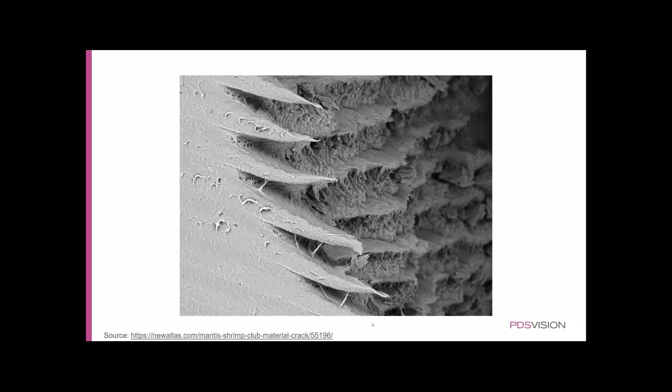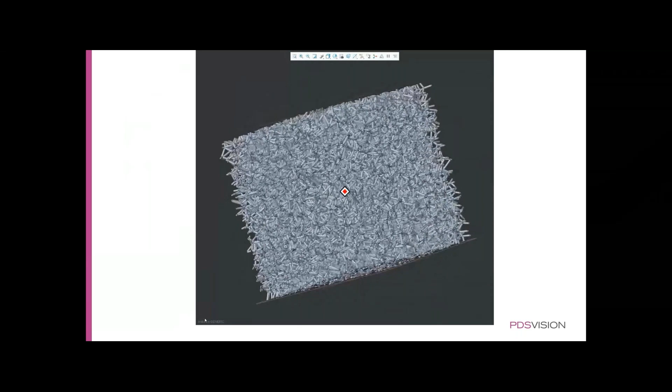What's exciting is we can start to do this sort of stuff in Creo. What I'm showing you here is an animation. This is not the mantis, but this is a Creo lattice that I created, and it's an immensely dense and very complicated set of geometry, but it's created with one feature called lattice, and it's one of the best features in additive manufacturing that you can take advantage of, that I'll be talking about a little bit later. Just look at how complicated and interesting that shape is.

So this gets me excited about what you can do. You can actually do a lot with 3D printing these days. I have a 3D printer in my basement. I hope you do too. I find that there's a lot of sustainability play that you get with additive manufacturing.

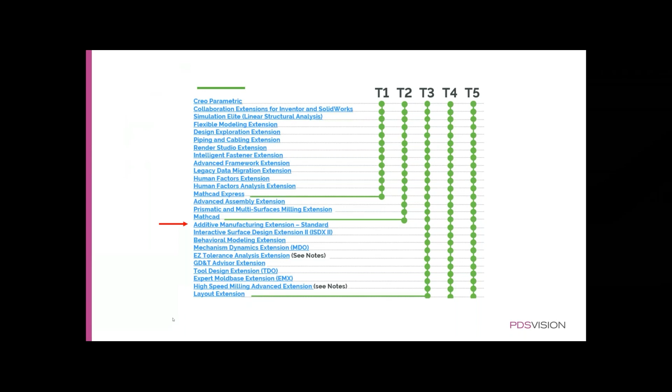I should back up and say that the additive manufacturing extension comes with a T3 license. So if you are a T3 license holder, you already have the additive manufacturing extension. You have the standard capability. You can also buy it as an a la carte feature.

What it does is it lets you take parts and add these lattice materials inside them in various different forms. You can choose different types of forms. There's different types of beams and lattices. You can run analysis on these various items. And then you get some help packing a tray so that you can print a lot of these all at once in a printer setup.

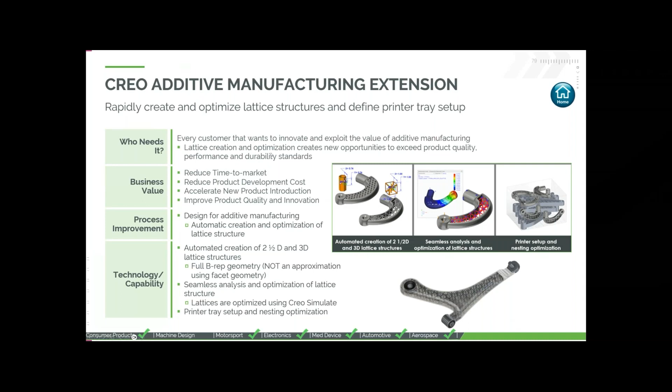So this is the kind of capability that you get with the Creo additive manufacturing extension. There is yet another extension that is available. I have access to all the capabilities, but I did want to point out there is a whole other area of printing, which is metal printing.

I won't be covering much of this today, but this is the advanced part of Creo, which has an integration with Materialise. You know, when you buy a metal printer, which is a big piece of capital equipment, it's expensive, and it comes with its own build processor, and it comes with its own little problems. And Materialise is a product which is like a build processor. It's like a slicer, and it helps you get the parts on the tray accordingly.

I want you to notice this part here looks like a stamping. And that's what's interesting and sustainable about 3D printing, is that I've met people who say they just need one of these. They don't want to go through the trouble to make the stamping that's needed to make this part. We're at a point now where we can actually design things, print them, prototype them, refine them, and then after we prototype these things, we can actually do the work to make the stampings if we want to mass produce.

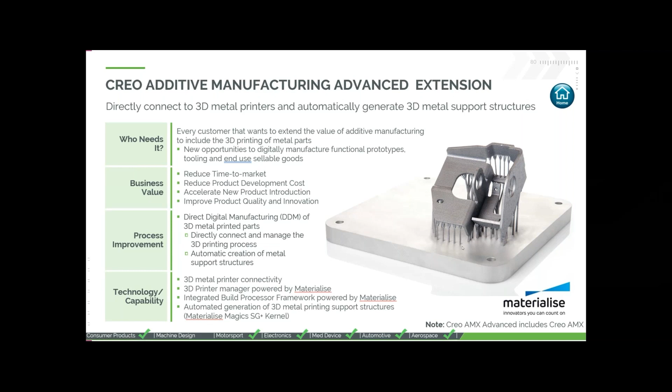But some of the capabilities that you get with this is the ability to wick away heat, and dealing with heat and thermal when you print with metal is a big deal. So that comes with the advanced part of Creo. So I want to step back.

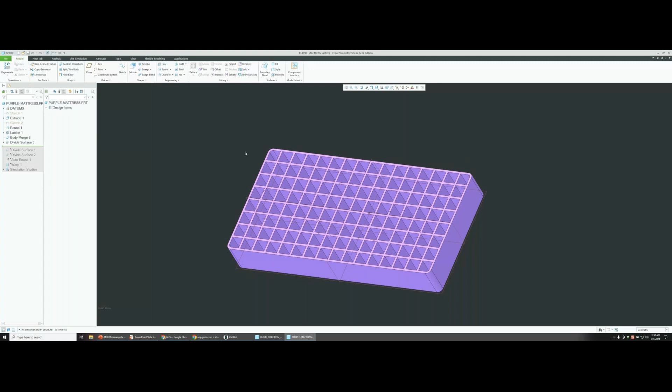Imagine if I got hit by one of those shrimps, and I'm actually allergic to shrimp, I would need to sit down or lay down on a purple mattress. I thought it'd be fun to explore that a purple mattress is indeed a metamaterial. If you don't know, metamaterials are a form of biomimicry. We all know that a honeycomb is created in nature, and so are other shapes, and these are all forms of lattices. Now, this part here was created with just one lattice feature.

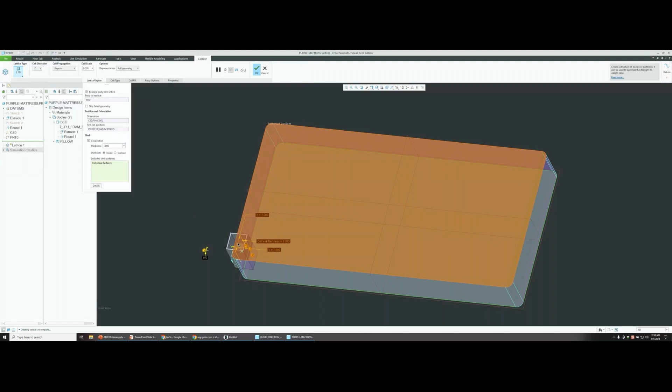I know there's lots of ways that we could think about creating something like this, but I thought I would show you that right away I've redefined the lattice, and this is a 2.5D lattice, and I'm pointing it in the Z direction, and I've even specified which corner I want it to be, and if I zoom in, I get all these little handles. I'm going to warn everybody to stay away from these handles. These handles can actually be a little bit bizarre to work with, so I recommend that you actually type in your values.

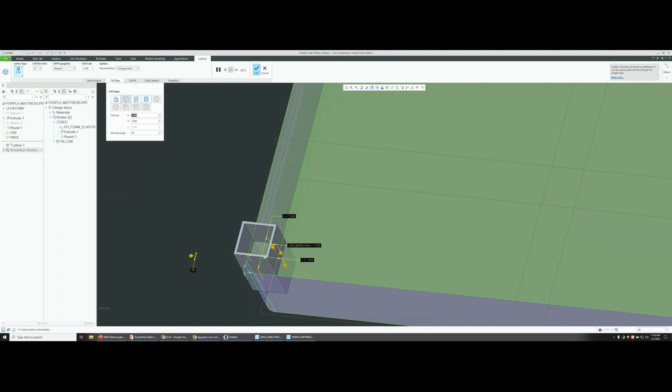So in this particular case, I've chosen a square. What would happen if I chose a rectangle? I'm sorry, a triangle. Okay, so I'm just going to click triangle. I'm going to click OK. And suddenly my material should change. And now I've got a purple mattress in a different form.

And I've actually taken this and done a live simulation to see what the effects would be if I actually did lay down on this mattress. So there's a sort of a figure of some pressure. I actually typed in my weight, and I can deform this. Oops, that didn't look very good. Hold on a minute. Animate, deformation. It's just happening there. Animation options, speed, scale, play. There we go. Look at that.

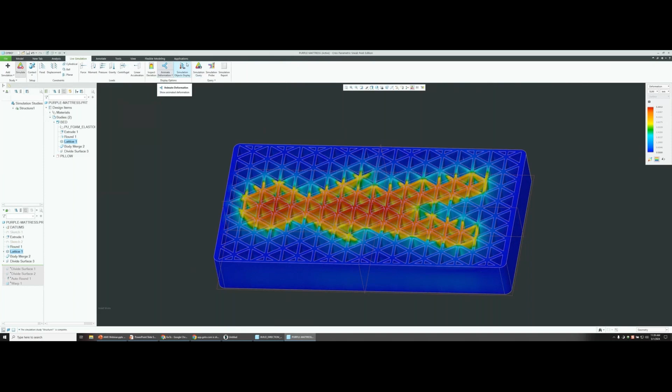So I could flip between different types of lattices and run these kind of simulations, and very easily see what the impacts are going to be. I've actually simulated this as foam, and this is just a simulation of where the impact would be with this divided surface that I put on here. Let me shut this off and turn off the deformation and some of the points there and get back. I want to create a new part from scratch and show you how to create a lattice in the first place.

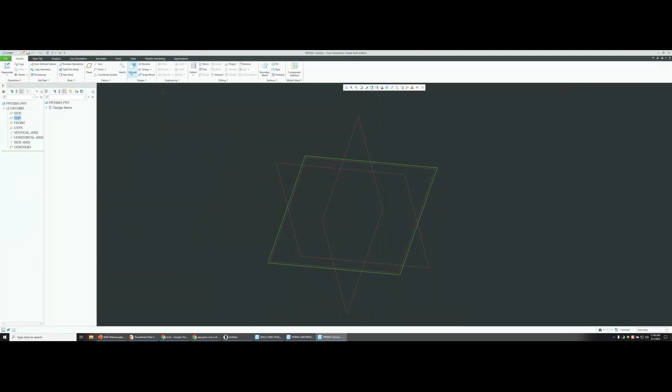I've got Creo here. This is Creo 10, and I'm also going to be showing Creo 11. I'm going to be showing a new capability in Creo 11 to actually connect lattices together. But let me show you a very simple basic demo. I'm just going to create a block very simply here.

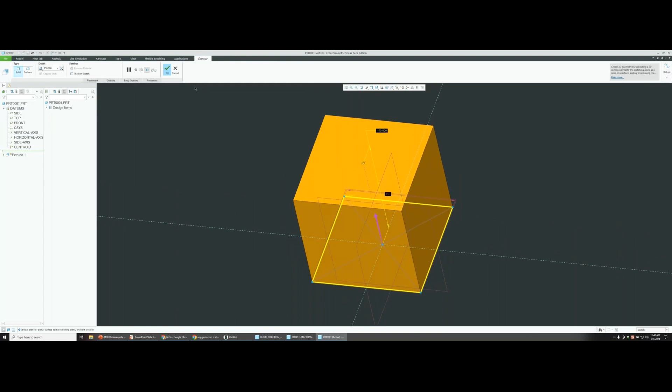Hopefully you all know how to do what I'm doing here. In Creo 10, they added a great feature: your very first dimension, I can type in and it automatically scales, which is beautiful. Saves me a lot of time. 150 - there, I've got a box.

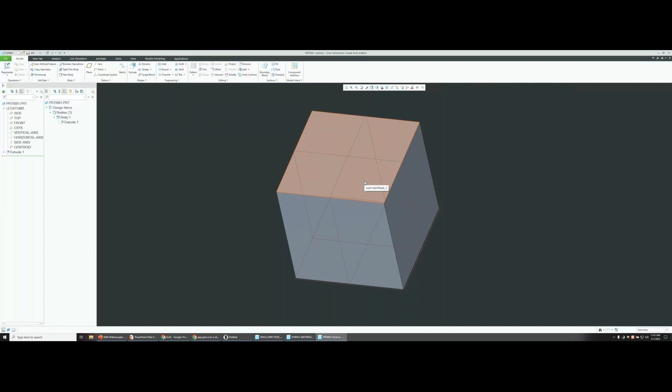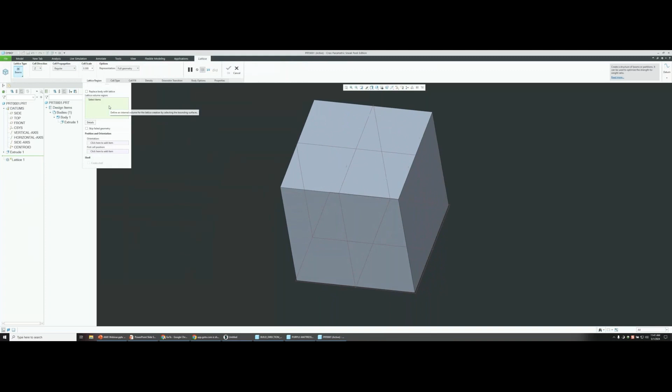I hope everybody on the call has experienced using bodies. Right now, every time you create something in Creo, you're creating at least one body. There's cases where I may want to specify an area where I'd like the lattice to be. For this simple explanation, I'm going to go into the lattice by going to the engineering tab, and I have something here called lattice. The very first thing it's going to ask is to replace the body with lattice, so I'm going to click replace.

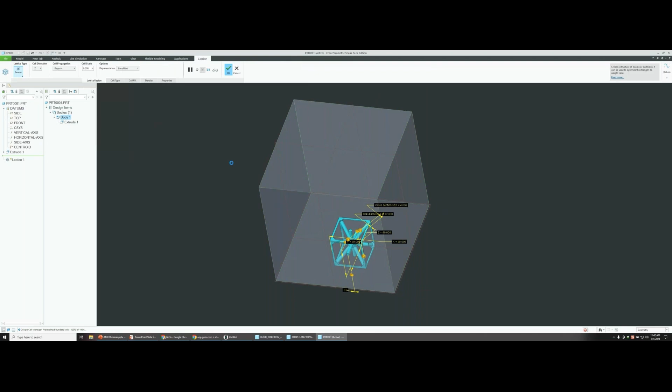The UI here goes from left to right. This is basically a beams type lattice. Here's a tip: don't use full geometry for now as you experience and play with this - simplify it. I'm going to go with simplified, and I'll explain that later. Let's just go see what is created with the defaults. Look at that structure there - that's quite interesting how that was created.

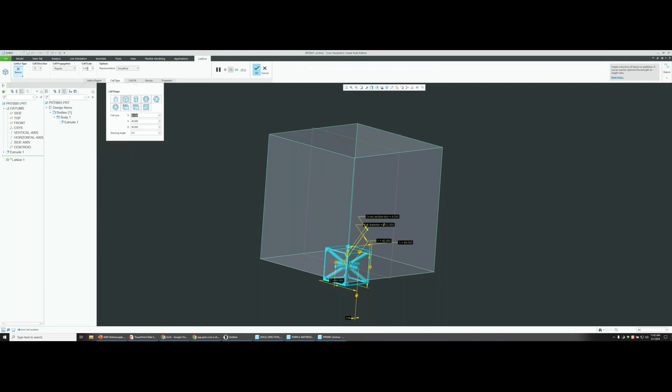Now let's go see what other types of stuff we can create by redefining that lattice. This one is called beams. Like I said, I don't recommend moving any of these with the draggers - I'd work directly. There's a capability here called scale. Scale works - if I wanted to make this double in size, I could hit 2 and I would double that. Now it's scaled accordingly - it scaled the ball, it scaled the beams, it scaled everything.

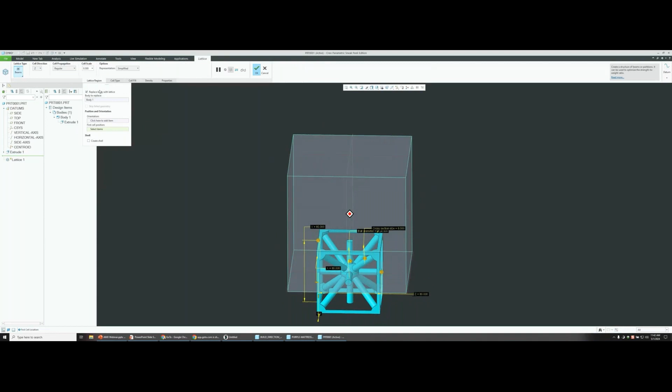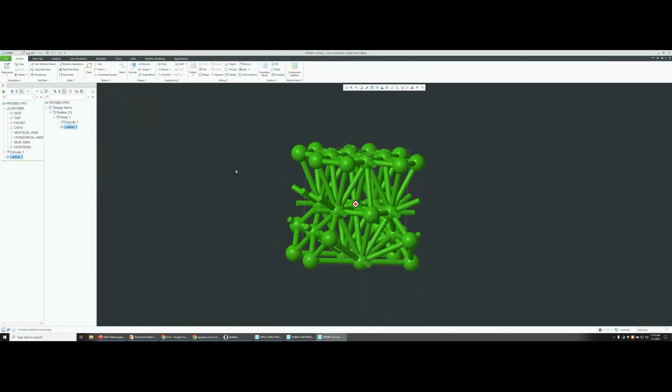Let's go back and take a look at what some other things I can do beyond beams. By the way, I have these other types of figures I can create - quasi-radial. I can say that I want 6 sections of this and see if it will let me take that, and I'll get a sort of bizarre shape here. If I realize that's not the right scale, I can keep redefining this feature over and over again and changing the scale down.

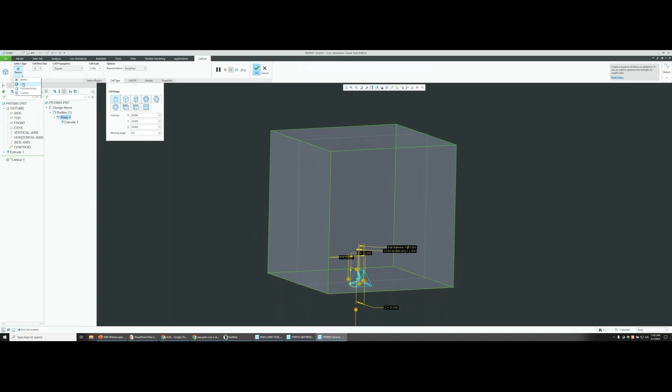One thing I want to show you about the lattice that I haven't explained yet - I'm just going to switch this back to something more normal, like regular, and maybe change the cell type to triangle and change beams to something called 2.5. This may make a little more sense for people. Let's say I was making a heat exchanger and I wanted to create something like that - maybe I want that to be a substrate where I plan on putting a piece of material on one side, and a piece of material on the other side. Let's go ahead and redefine this.

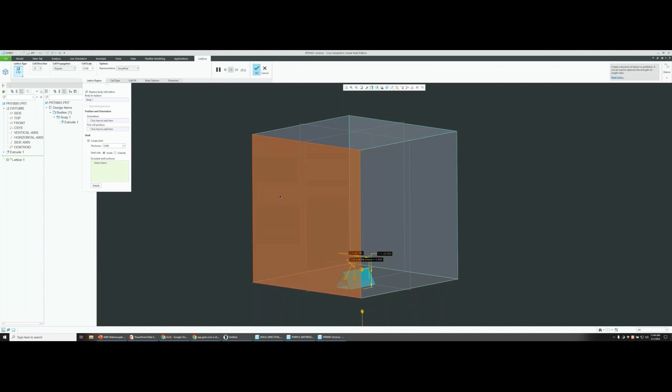I'm going to show you that the lattice capability also has an extra feature called create shell. So if I create shell, I can say that I want my body to have a 5mm shell on the inside, and I'm going to pick 2 surfaces. This surface, I'm holding the control key - I'm using a space mouse, by the way, to spin my model. I'm going to click that, and let's see what kind of geometry that creates. Now I've got something that is like that.

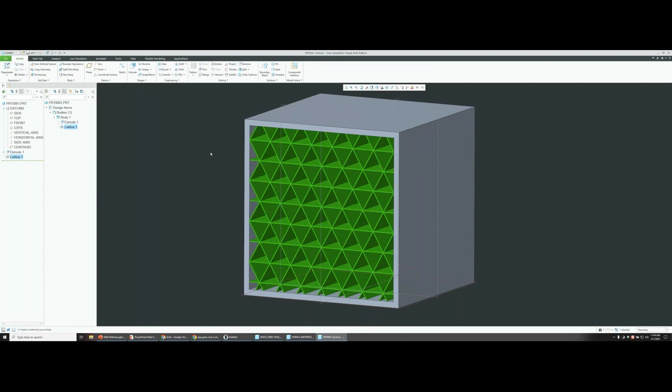So you can create all kinds of interesting geometry, and I find people creating building facades using this. I'm going to have a couple of examples of other stuff that I've created with lattices.

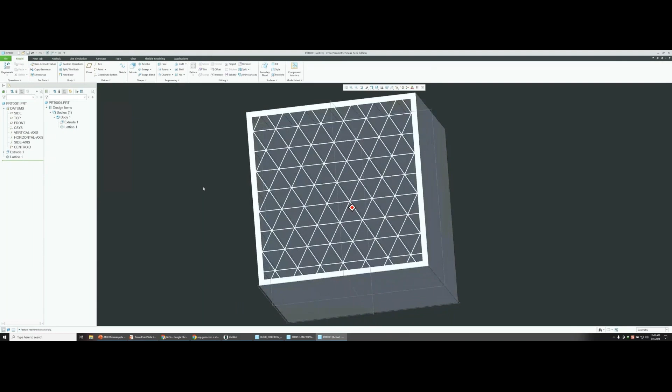One thing I want to show you, though - I've been showing you this simplified, but I want to show you what happens if I go to full geometry. This is where the power of Creo really comes in. Full geometry has given me all full geometry - this is all geometry. I can go in here and add a round. If I wanted to, I could add rounds in all these areas here. For some reason, these were areas that I wanted to have rounds in. This creates real geometry, and I think that's a very powerful feature.

All right, I'd like to get back to the slide deck for a minute since we covered a few things. There's a few other things that I want to demonstrate.

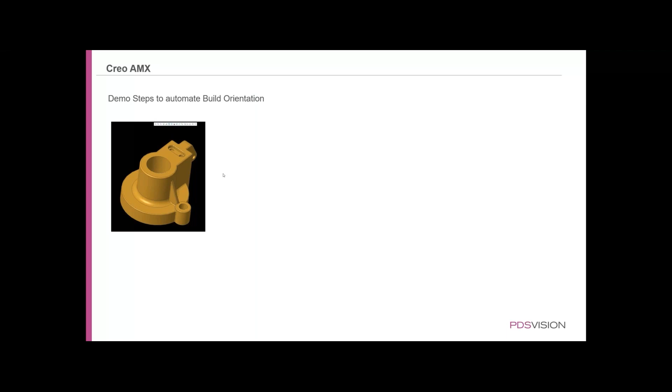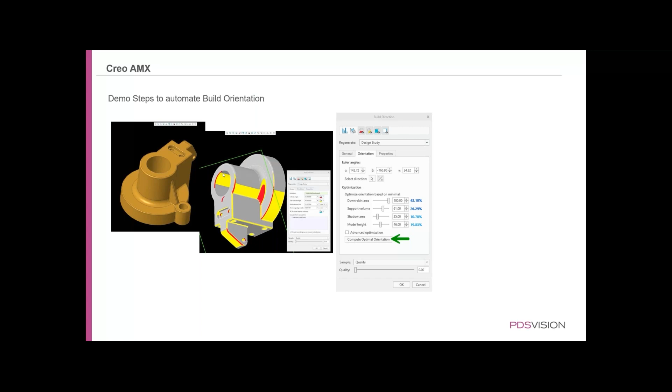I want to demonstrate a capability I really like, called build orientation. I've been given this part by an engineer who wants it printed at a certain angle because of strength considerations—he's a manufacturing engineer. I'm going to show you how I can pull this part into Creo and have it find its own computed optimal orientation, which will minimize material used and minimize the contact area required on my printer. I'll also show you how that graph works. Let me give you a demonstration.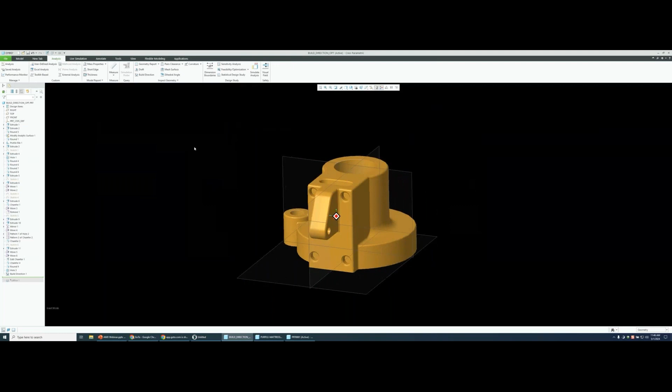So I've got this part here. It doesn't have lattices in it, though it could. My question is, what direction should I print it in? I could look at this thing all day long and have ideas about how it could be printed—it could be printed this way, but the engineer told me he didn't want it oriented in that direction.

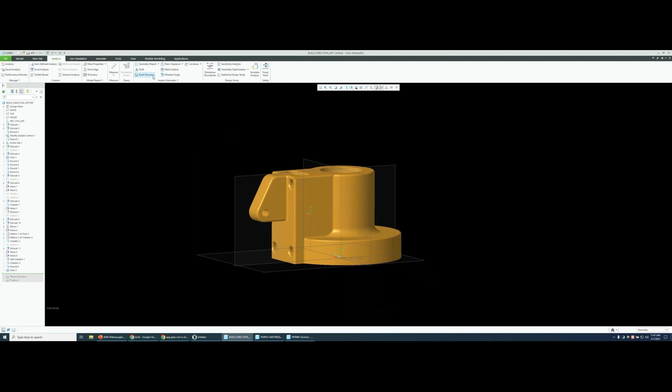So I'm going to go into the Analysis tab—usually I'm in the Model tab. There's an area called Build Direction. I've already created one, so let me recreate it. I click Build Direction, and it asks where the tray is. The tray would likely be that surface there.

There are a number of settings I've already put in here from my engineer—down-facing angles, critical angles, all that sort of thing. I'm going to let Creo calculate automatically the best orientation given my particular printer needs and conditions. It's computing now—it shouldn't take long. Okay, it's already done its job. I click OK.

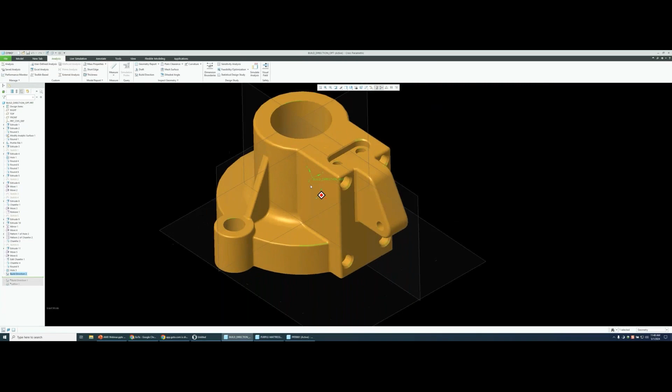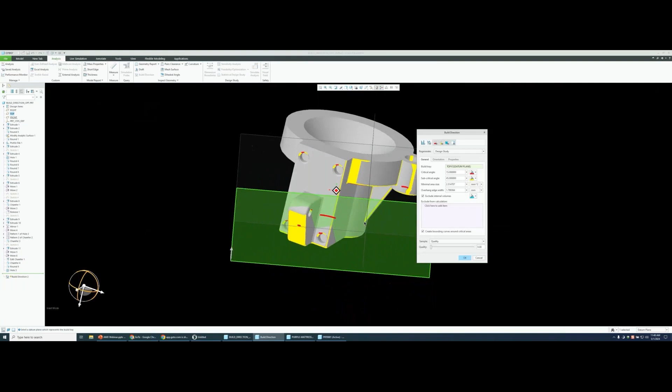Now it's given me a new coordinate system called build direction. If I orient it according to a Cartesian coordinate system, you can see it wants to print the part like this. If I redefine the feature, it'll show me the areas where it believes the minimal areas would be. I've actually 3D printed this part, and I'll show you that it printed just as Creo indicated, leaving these yellow surfaces fine. The red surfaces were a little dusty, but the part printed okay.

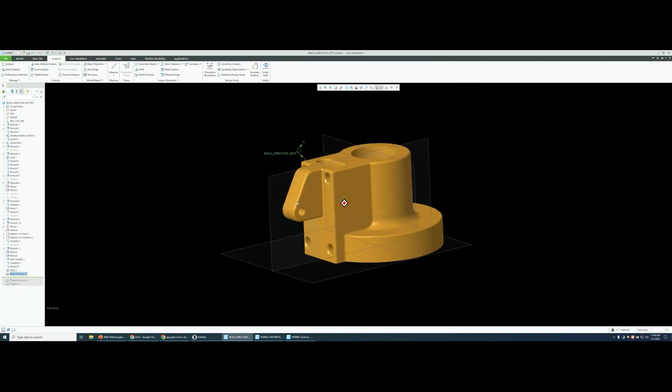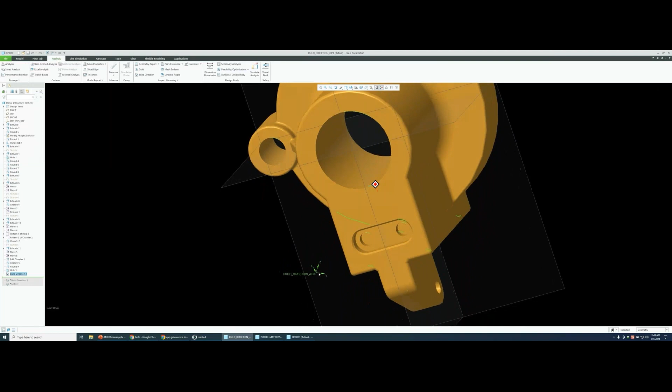But I'm going to show you a little trick I think is very interesting. I don't have a metal printer in my basement, so normally I could go into File, Print, and Prepare for 3D printing. But since I'm using a 3D printer in my basement, I thought I'd show you a trick for how to get this orientation into my slicer.

I happen to be using a Bambu 3D printer. I hope some of you have access to 3D printers—I think having one is a sustainable choice because you can prototype and make all kinds of stuff. Well, let's see what we can do with this build orientation.

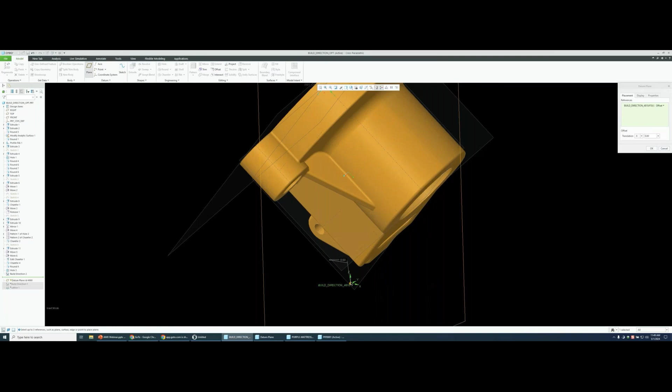I'm going to go back to the Model tab and into plane. I'm going to drive a plane through that and get it going in the Z direction. All right, so I've got a plane there—see that right there? I'm going to make that just go through. I'll click OK, so now I've got a plane.

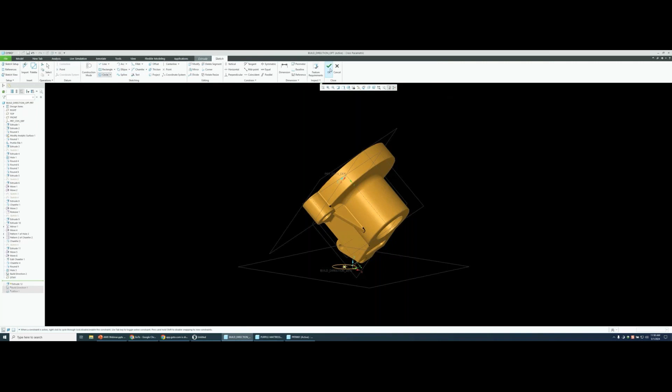I'm going to create some sacrificial geometry—something I'm not planning to print, but something that gives me some space. I'll snap to this and draw a little circle. Click OK. I don't really want it to intersect, so I'll make this little tiny disc. All I'm doing is creating a sacrificial piece of geometry I can use to orient my part when I put it on my own build tray.

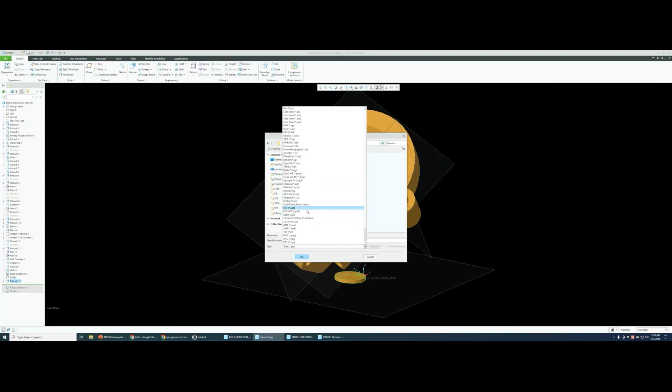Now we may be interested in exporting this. One of my favorite formats—I used to like STL, but I don't anymore. I've now moved to 3MF. You can go File, Save as a Copy, and I can pick 3MF as the format. I want to show you this Options tab. One of the neat things it does: if my part had lattices in it, we'd get a smaller file format, because in 3MF they package up the recipe for the lattices inside the file so you get a smaller file.

These are on by default, and I'm going to leave them on by default. They don't really matter right now because I'm not using any lattices, but I just want you to know that's a new capability in Creo 11.

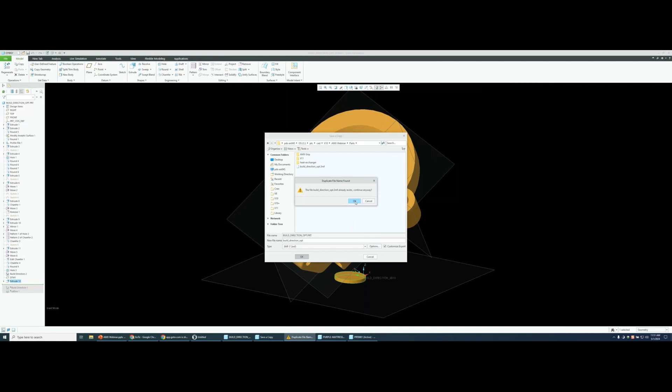So I would go with those options. The next thing I would do is click customize. I'll let this recreate what it's doing. Now, see this chord height? A lot of people don't know this, but you can type in 0, and when you type 0 it'll find the smallest chord height possible. I just click OK, and it's saved that file to my desktop.

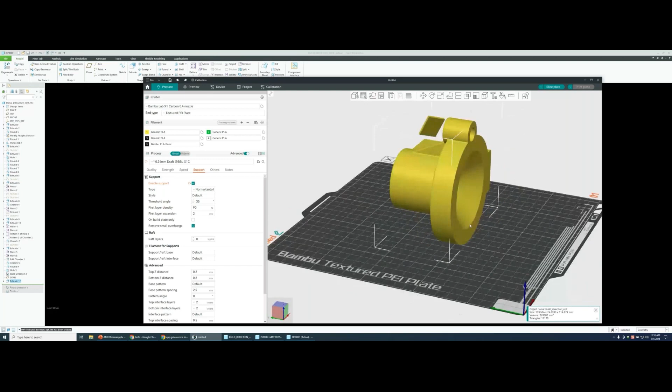Why don't I show you what would happen if I took that part into my 3D printer? This is what happens: I brought the part into the 3D printer, and I now need to take that sacrificial geometry that I created and get it oriented.

This slicer that I happen to use, which is sort of like a build processor, comes with the printer and has a capability for me to orient the part and lay it flat. So I'm going to look for that area that I had there—I think it was right there. And now the part is laying flat, and that's the orientation it wants to print it in.

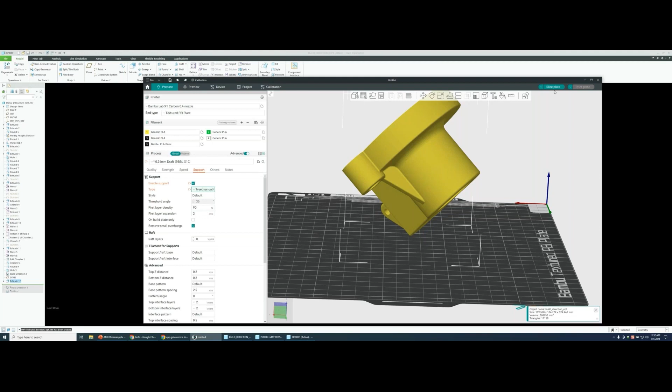This tool lets me move and get rid of that other object, so I don't care about that one. Then I can go over here in my slicer and control all the various settings. I'm definitely going to need support—probably tree support. Let's see what this does.

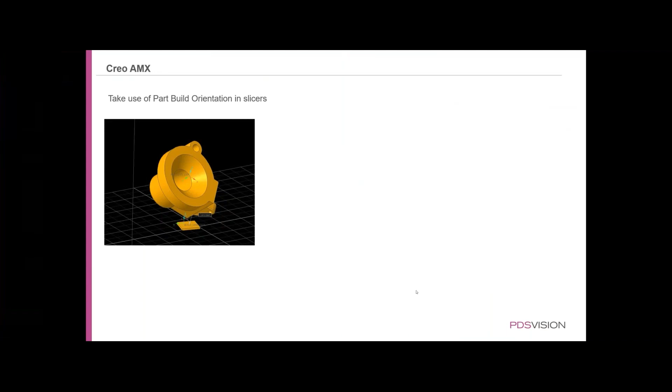I actually have a picture of this prepared to show you what it looks like—let me go back to my slide deck. So here's what we did: we took the part and made use of it in the slicer, and I was able to orient it and get it to look like that.

I actually printed it last night. It took only 3 hours to print that part, and that part was actually half the size—I scaled it. I also printed a bigger version, and it printed out really, really nice. I thought I'd give you a picture of what it looks like.

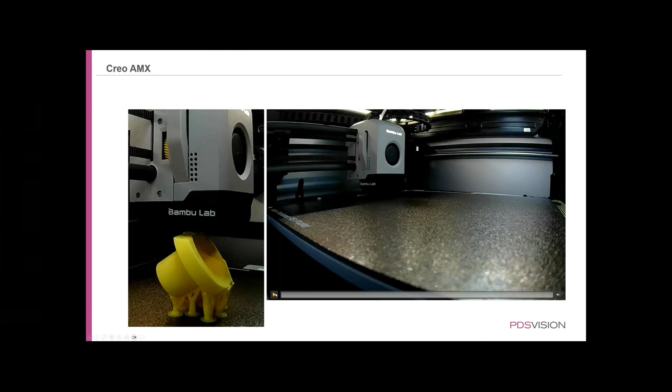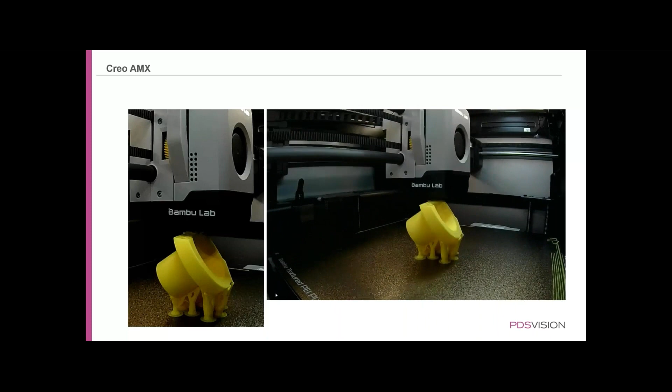Here is that part being printed on my printer. I actually have a little video I can play for you, and hopefully you can see what that looks like, how it adds layer by layer. These support materials may look like a lot, but they just snap right off.

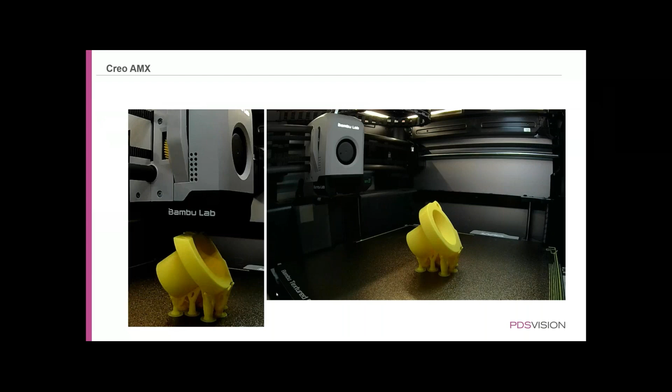The part was really strong—I measured it with calipers, and it was extremely strong, so I decided to print another one. I want to show you this is the resulting part. I used a pencil to illustrate everywhere that Creo predicted it would have difficulty and need support, and that's exactly where it landed.

All these little areas here I was able to sand—they're not really important to me. The part performance was really important, and the dimensions and scale were really important. Again, this took 3 hours and 42 minutes to print.

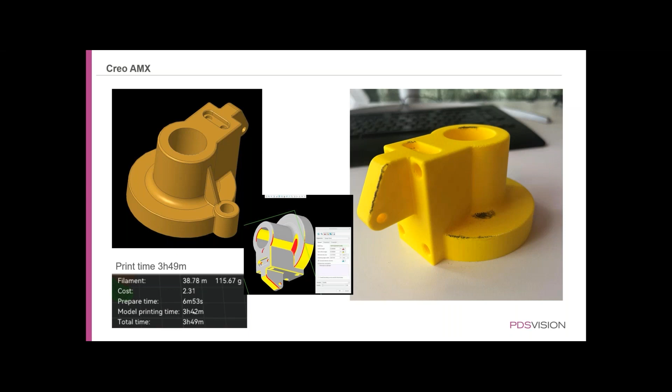I love that I can go from art to part, and I love that I have this part. I don't have my camera on, but I'm holding it in my hand right now. I was showing my wife the other day, and she was marveling at the fact that you can take a part designed by anybody, print it, have it in your hands, and have a real discussion holding it. So that's the kind of stuff you can do.

Let's take a sip of water for a minute.

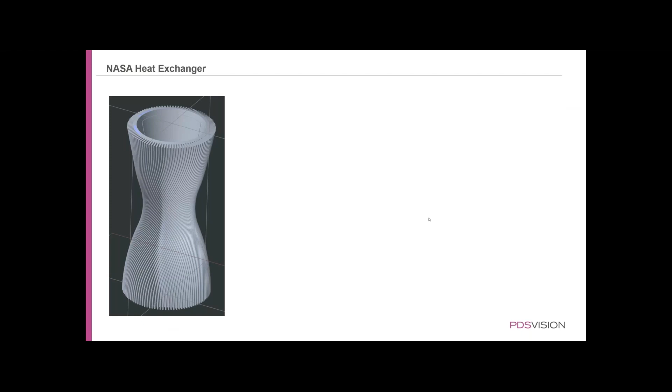And talking about heat exchangers, I actually got a chance last year to work on a NASA heat exchanger. It was really more of a radiator. They had a mission that they needed to take, and they had no idea how to fit a radiator around the vessel. And I came up with this design, and I wanted to see if it would print on my home printer, and it looked terrible. As you can see, it doesn't look good at all, and that's because I didn't orient the part accordingly.

So here is how Creo wants to print the part. I'm actually in the process of printing this part again. This part would typically be made of metal, but I'm printing it in plastic to show you here. It's actually printing right now in my basement, and it's about 6 hours of the way through, so we'll see how that comes out. But it just goes to show you that you can predict and understand what's going to happen in the print before it happens.

A few other interesting things you can do with lattices: I came across this article where someone, Oakley or some bicycle company, was bragging about the fact that they have this new bicycle grip that's better for sweat. It's rubber. And I thought, I could create that in Creo. And so that's what I did. If you look at the model tree here, it's very simple. It's just a very simple cylinder with a nice rounded area here, the hole. And if I were to zoom in here, I think you could see there's a little lattice here.

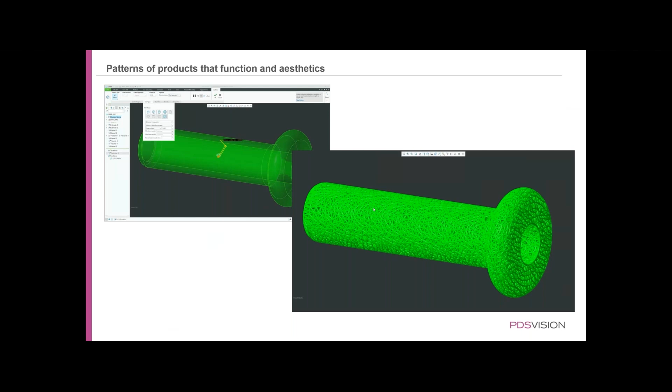And this happens to be a stochastic lattice, which is a certain type of lattice which is randomized. As you look at this, it's sort of like Mother Nature. It has no starting point, has no end point. It seems to sort of flow naturally. And I've actually given this file to a friend of mine who's got a powder bed fusion printer, and he's going to print this out of TPU material, and we're going to test how it works. But you can use lattices in that way as well.

So science is really advancing us beyond screws to hold these things in, to where we're now 3D printing parts that go in your body. This has been FDA approved, and there's even been an FDA approval for some materials, some plastics, such as PEEK, to be actually implanted. So there's a lot of great advancements happening in the medical and bone implant sections using lattices.

And I thought I would end on this one. I saw just recently this basketball, this airless basketball. I have no idea why this became sort of famous, but I think the basketball company wanted to try to do something related to 3D printing. This is a $1,700 basketball that you can buy. It's airless. It supposedly plays well. I wouldn't pass it around in water. It won't float for sure, but I thought I could create it in Creo.

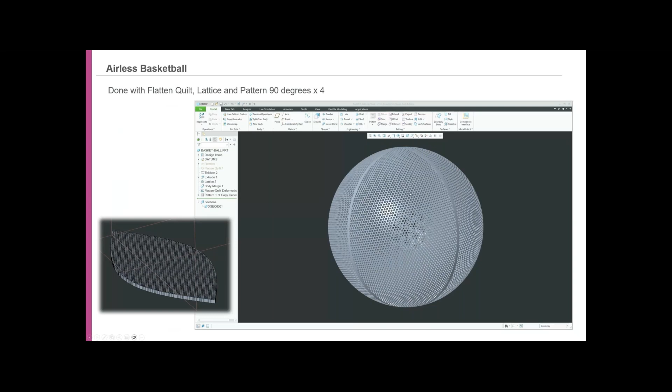And then I did a lattice on it, and I chose that pattern right there because that's the one that they had in the model, and I've been able to recreate it. And then afterwards, I used the Flatten Quilt, which basically unbends the quilt this way, and I just patterned it 4 times. So that's how that works.

So before I go to questions, I want to show you something interesting about Creo 11. I have Creo 11 loaded here. Let me see which version this is. Help, About Creo Parametric. This is Creo 10. I need to go to Creo 11, which is right here. Let me just close this session here. File. Lattice testing.

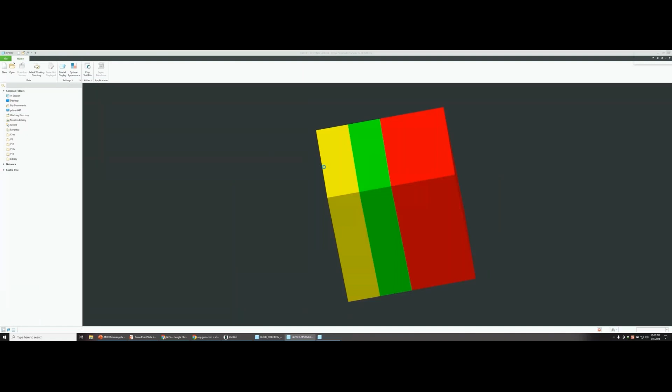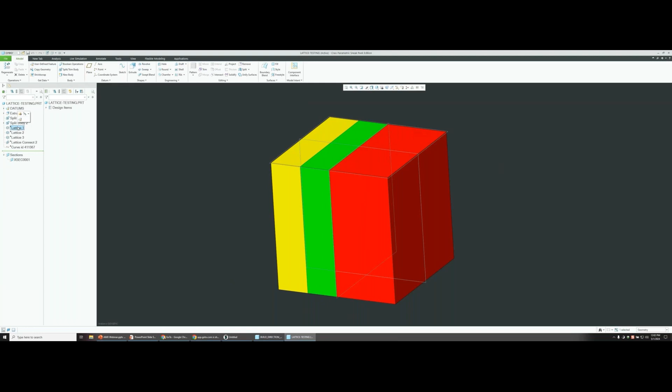So I'm using Creo 11, and a lot of customers that are using lattices have asked, how do I connect lattices together? So I've got 3 simple bodies that I've created. One is red, one is yellow, one is green, and I'm gonna resume these features to show you what lattices look like. So this lattice here is of a certain type. I'll redefine it so you can see its definition. You can see it's got a cross section of, it's very hard to sometimes see. That's why I like using the values up here.

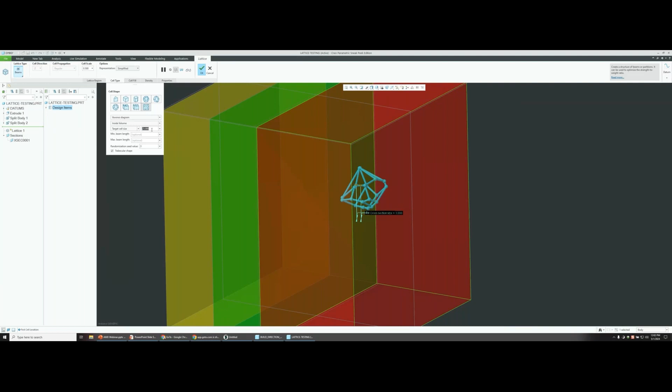So it's got a target cell size of 25, and it's going to be a trabecular shape as specified by the design engineer. And this is, by the way, a stochastic beam. There are also auxetic beams that you can set, if you don't know about auxetic beams, they can do sort of negative Poisson's ratio. But this one right here is just going to use stochastic beam lattice, and I'm using the Voronoi diagram for that. So let's see what that creates.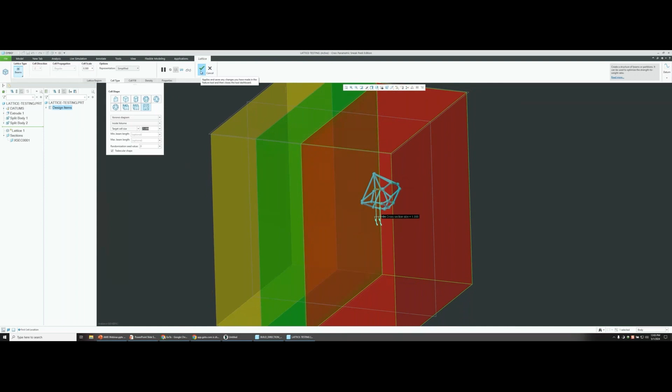Okay, that creates that lattice. So let's resume this lattice and take a look. I wanted to create a lattice that was much more dense. So see how this one on the red is less dense, and my theory is that bone would easily start to grow through the red, but eventually I wanted it to start to kind of grow and bond into a much thicker area.

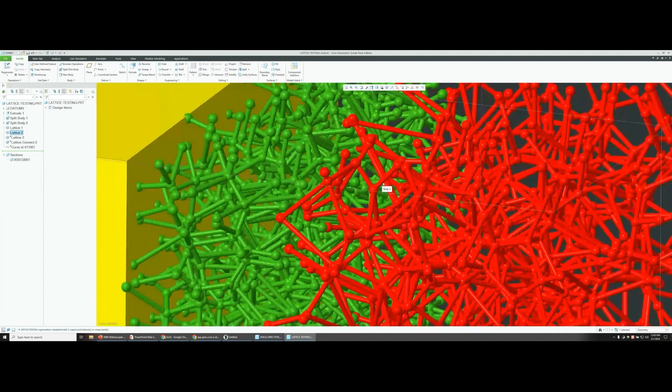So I've got these 2 lattices right now, but notice as I zoom in on these things that these balls aren't connected. These are called dangling beams. We would not want to print anything like this right now because we cannot have these kind of dangling beams sitting around. And that's where Lattice Connect comes in. So I'm going to resume this feature here.

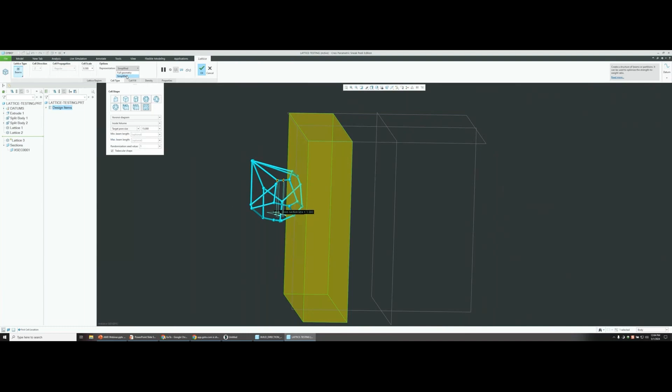And I have the last lattice, which is a whole other different type of lattice. Let me just redefine this here. It's very powerful. This one here has got a target pore size of 15, so the porosity is much bigger. Instead of target cells or number of cells, I'm using target pore size of 15. Okay, now all of these have been created using simplified representation, and that's really important if you're going to take advantage of this capability I'm going to show you. So all these right now have been created as simplified.

What Lattice Connect lets us do is, I'm going to just resume the feature, and you're going to see it's going to propagate this first lattice all the way through to the next one, connecting every beam so there's no dangling beams left. And there's settings that let me inherit things like ball size, beam size, and so on. So let's see what it creates here. It's going to create one unified red lattice. It does take a little bit of time to calculate.

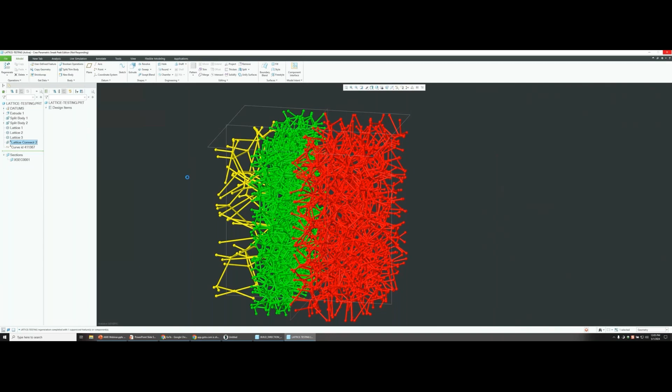There we go. Look at that lattice there. That's just what I'm looking for. It's dense in the middle. It's sparse on the outside. I can do a sort of cross section on this if I want to see what that looks like there. And so let's look at Lattice Connect for a minute to show you some of the features it lets you do.

Hopefully this is something you guys would want to use. See that it has this ability to inherit parameters. So it's going to inherit the first parameters of the first lattice that I chose. There's an order of operations. There's a second lattice that I've chosen, and the third lattice. So I'm using the first lattice as sort of its, I want to inherit all those properties.

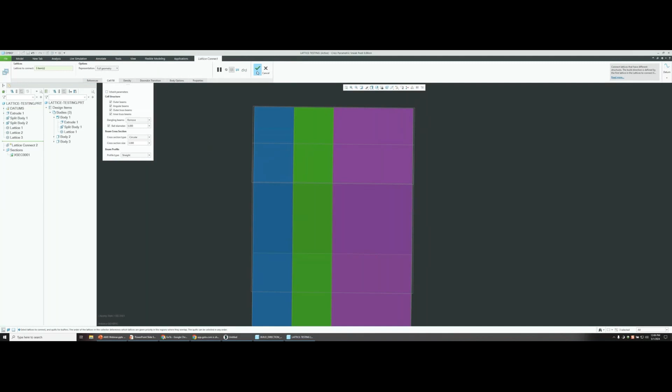If I didn't, I could uncheck this, and we can see what the results would be of that. I'm expecting ball sizes to change. I'm expecting, well, let's see what happens. You can see that it's counting up here, 34%. And it's really good to have a good, powerful computer when you're working with lattices. It can be pretty intense on the CPU, but it creates really beautiful looking geometry. It's almost done here.

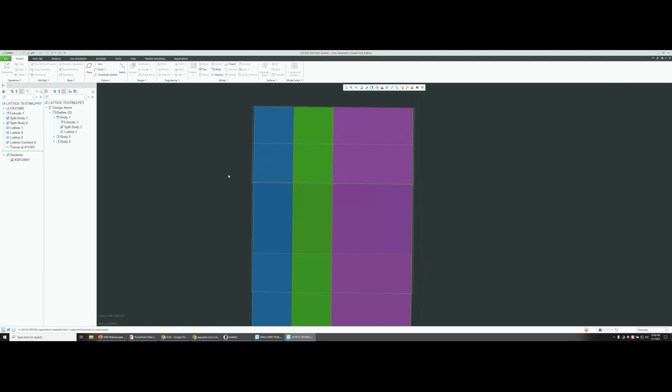Okay, look what it's done there. So let's see, it gave me different parameters because I didn't let it inherit the parameters that I said I would before. So if I go through here, I can change and make all these diameter changes, but to inherit them, I just click this. There are ways to drive density and uniformity. I won't do those, but you want to pick full geometry when you're done with this, because then you'll be able to 3D print it. So let's just let this finish.

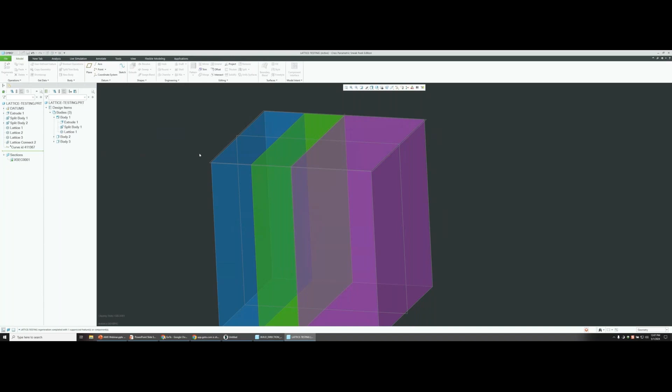It's counting up. And again, it should give us one unified lattice. And this is a great capability that's been added to Creo 10, and it's based on customer feedback. I get the opportunity to talk to thousands of customers, and a lot of customers are using these capabilities, and they tell me they want this capability, they want that capability. I bring some of that information back to PTC.

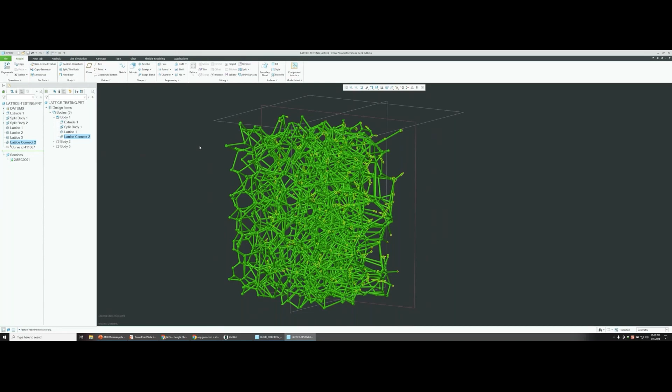But you know, this is all done in Creo, and you can combine this with whatever it is that you're making to really move to the future. You can now 3D print these types of structures. You can actually perhaps even throw the punch of a shrimp, which is an amazing story. So that's the demonstration.

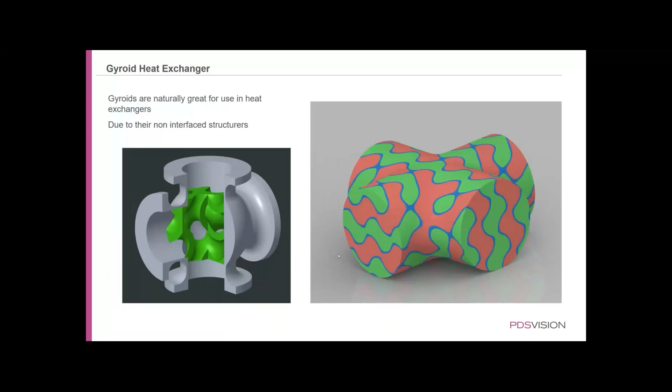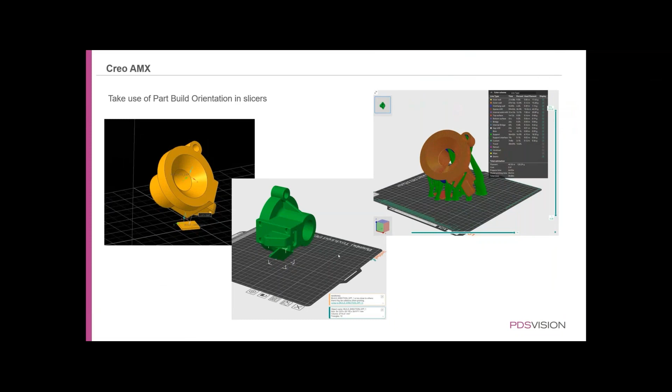I'm going to turn off this here. Yeah, I really love additive manufacturing. I think it's a very cool technology. And you know, I'm using Creo about 6 hours a day, and I love 3D printing parts that people send me. And I encourage you to get into 3D printing and use sustainable practices to actually advance the state of the art with your products. So let's see if there's any more questions before we wrap up.

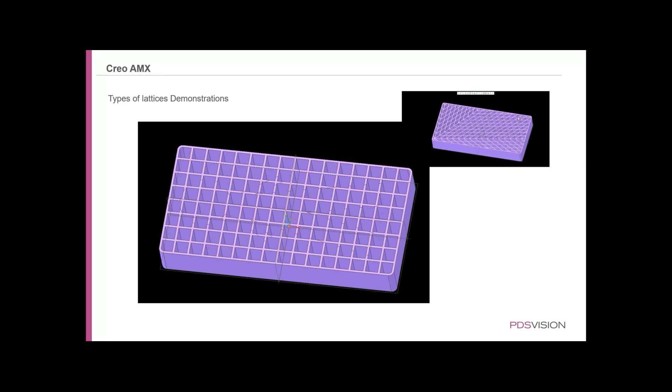You know, that's another interesting thing that's been done with Creo lattices, is that you can create helmets that have a lattice material in between the outside of the helmet and the wearer's skull, and it can be used to absorb impact. So I know that that's been used in another application as well. So that's it. That's my demonstration.

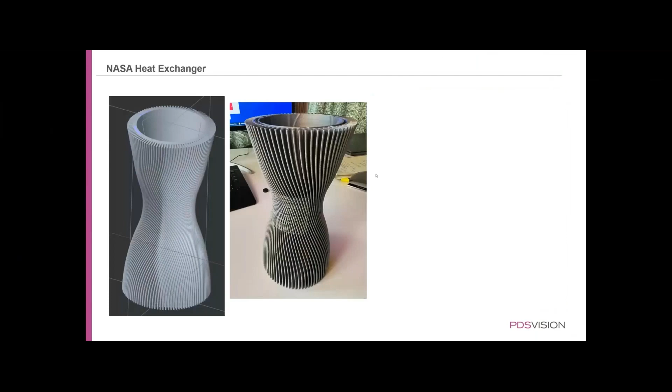And I hope that we can have a conversation about additive manufacturing and where it's going. It's a very exciting field. For me, additive manufacturing unlocks the power of geometry. We were stuck in the dark ages with subtractive machining. Now we can add and we can create, we can subtract, and we can divide. So it's a really cool piece of technology.